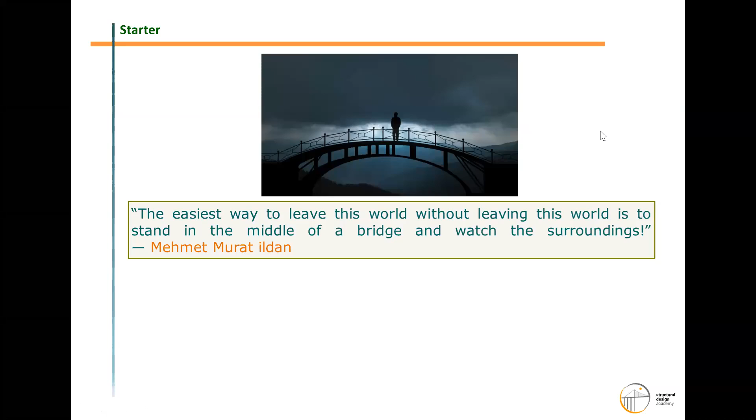Just to get into the subject, I generally prefer to start with a starter, so that we can be involved from the surrounding environment into the subject. To give emphasis on the bridge, what is a bridge as a structure in a philosophical way? It is a structure where if you stand in between, you will feel very relaxed and find that there is nothing surrounding, and you can have real peace of mind. In the seismic context, we can say this is basically human nature, and it reflects well in our structures also.

The more we remain rigid, we have to sustain very high stresses and face many problems and difficulties, and sometimes we may break down or shake down. The same philosophy applies to bridges, and not only bridges, to all structures. Rigid structures generally attract more stress and are vulnerable to more failure. So basically, try to remain flexible, determinant, and just follow the rhythm of the structure, rhythm of nature, and apply a similar rule to our structures. Propose our structure so that it has more flexibility, determinacy, and everyone can easily understand the form of the structure.

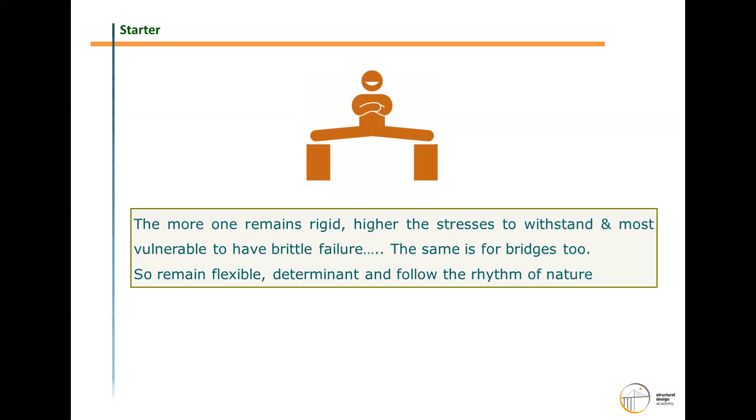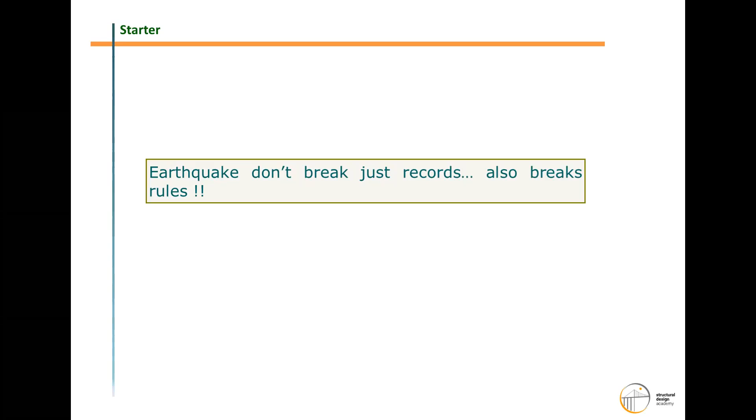Basically, with every earthquake, if we see the history of past earthquakes, it has not just broken records in terms of intensity - say a 4 Richter scale earthquake one year, and the next year in some other region it's 5, somewhere 6, 7, or 8 - but it has also broken the rules. When we talk about breaking the rules, it has been observed that every earthquake has changed the philosophy, engineering, and science that we apply in the design and analysis of various structures. So every time we come to new things, new theories, and new aspects. This is how our entire earthquake philosophy and all earthquake codes have been developed. It is not based on just basic engineering or basic rules - it is from observations of past earthquakes.

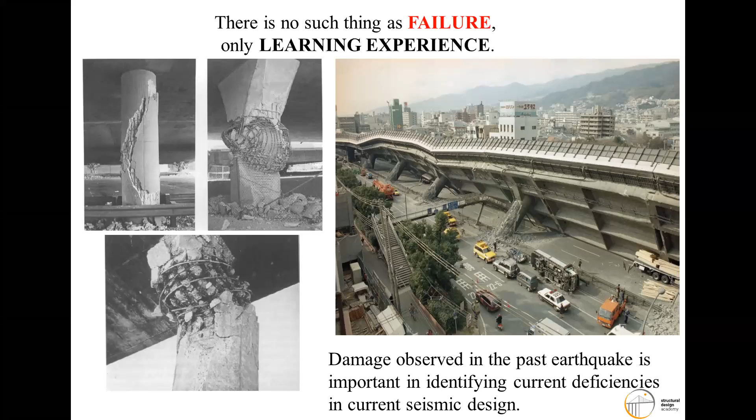When we say failure, it is not just a step down or going behind progress. The important aspect of failure is that it is a learning experience. If you observe any failure very minutely, we can learn a lot. There might be very small things we can learn from success, but there are many more aspects we can learn from failure. All the recent sophisticated codes all over the world for seismic design have been developed based on failure analysis, failure observations, and study of structures which failed during past earthquakes only.

Now, as we are going to discuss the earthquake analysis of bridges today, I want to give you a brief introduction to the structure of the bridge, because I'm not sure how conversant everyone is with bridge geometry and its formation. To understand any structure's behavior regarding any force action, it is most important to understand its formation and geometry itself. So basically, a bridge is made up of three components.

The topmost component, which is the highest elevation in the bridge, is called the superstructure. The part below the superstructure is called the substructure. Basically, substructure provides the platform to raise the superstructure, and the bottommost part is the foundation. Foundation serves the purpose, similar to other structures, to transfer all the forces of the superstructure and substructure to the firm ground, so that the entire structure can withstand and flow the entire force to the foundations.

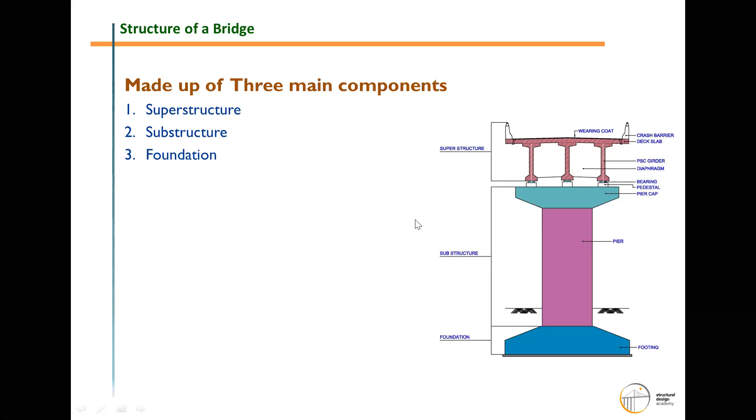Now this is just how the bridge is composed. There is a bit of difference between a building and a bridge, in that a building is basically made up of three main components: slab, beam and column. All these three components are internally connected with each other, forming altogether a frame structure.

But it is not like that in the bridge. Bridges have a simply supported structure type of system most of the time. When we say simply supported, it means the entire superstructure is directly resting on the pier only, so it is not connected with the pier, it is supported on the pier. The superstructure rests on the bearings, which transfer the force to the pier and foundations.

If we talk about the types of superstructures, there are basically three types. One is the slab bridges. Slab bridges are very similar to the slab of our buildings, but comparatively having higher thickness and more width, because it has to withstand higher vehicular loading.

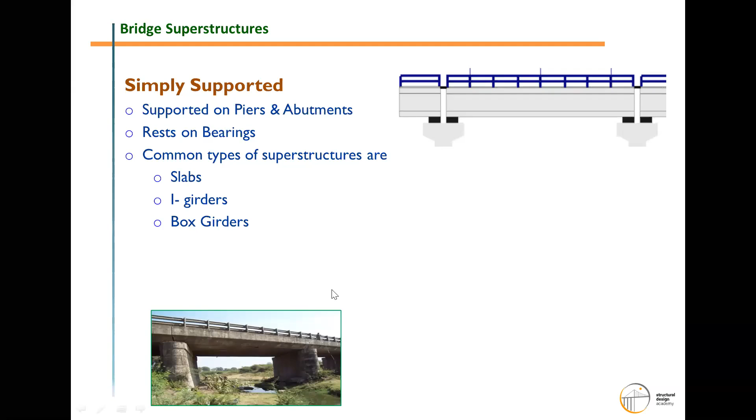Second type of superstructure is the I-girder bridges. The I-girder is basically a long beam having larger depth compared to building beams. Several beams are put together to form a superstructure.

The third type is the box girder. Basically, the box girder is a reformed shape of the I-girder only. All the I-girders are connected with the slab at the bottom also, and then we get a box girder, which is hollow inside. These are the three basic and widely used shapes of the superstructure.

There are other shapes also, but with these three we can discuss the seismic analysis very easily. As we discussed, it is a simply supported span - the superstructure is supported on the bearing, and the bearing is supported on the pier. This means the superstructure is not directly connected with the pier.

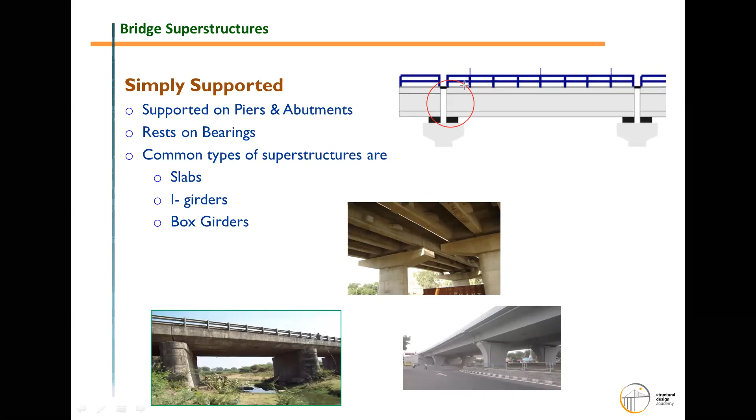Now another form of superstructure is the continuous span. If you see in the previous slide, there is a gap between two spans. That gap is basically to allow the superstructure to contract and expand under thermal variations, so that the internal stresses due to temperature variation do not affect the structure itself. To release those stresses, the gap is given.

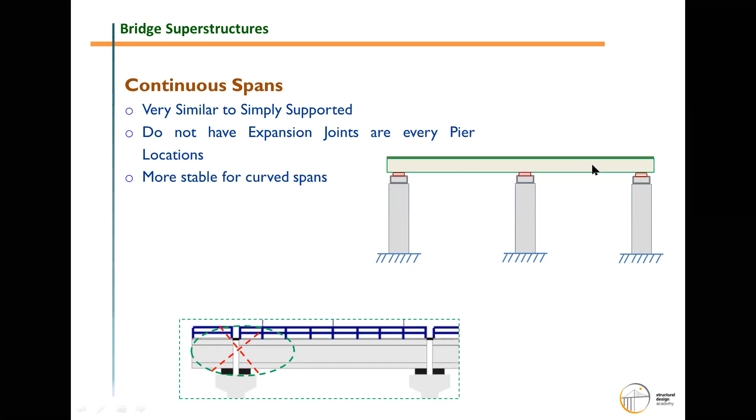In another form, the gap is not there - two spans are made continuous, without that gap, and we can have a continuous superstructure. Most of the time it is very similar to the simply supported structure itself. But because the adjacent spans are interconnected, the benefit is that if we have a curvature in the plan, the stability of the structure is more confident in continuous type structures, because the load shared by one span can be transferred to the other to keep it in a stable position.

Now the third type of superstructure arrangement is the integral bridge. In an integral bridge, there is basically no bearing. We can say it is more or less like a building structure - the pier is directly connected with the superstructure, so the concrete and reinforcement of the pier and superstructure are interconnected. In this case, we have to consider this as a monolithic structure, or we can consider the frame action of the entire bridge system.

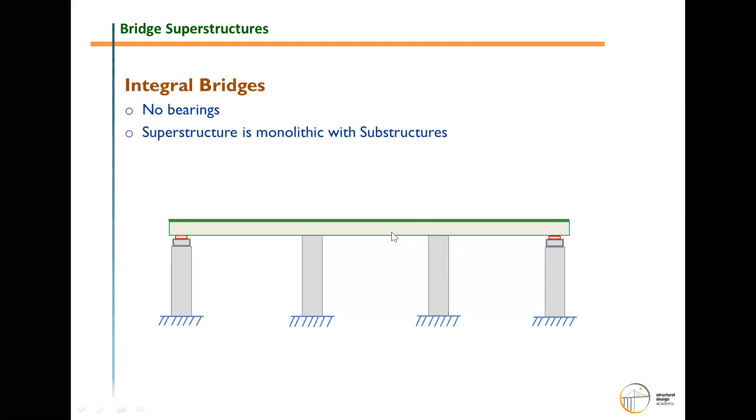Now, from these three types of superstructure, we can understand that the force transfer mechanism from superstructure to substructure works in two ways. If it is a bearing bridge, the force is transferred to the bearing. If we look at this system from a seismic context, basically this is a flexible system - the superstructure does not attract or react to any seismic force, it just acts as a lump mass. Under seismic action, the superstructure will not generate any internal stresses; it will just act as a lump mass, and whatever seismic effect occurs will be transferred to the substructure through the bearings.

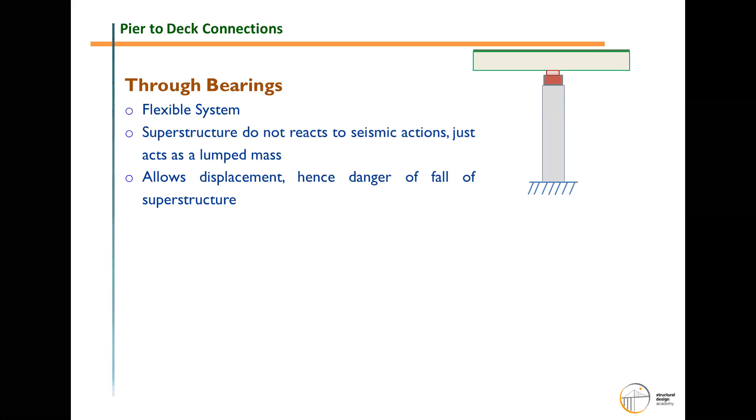As it has no capacity to sustain or develop the stresses under seismic, it allows a displacement because it is just simply rested on the bearing. So the deficiency of this type of system is that there is a danger of fall of the superstructure under the seismic condition due to the horizontal force acting on the superstructure.

In integral bridges, it is monolithic. So the dislodgement of the span or collapse of the span of the superstructure is not there. So this is the benefit over here. But now this is a stiff structure.

In the first, through bearing structure, the piers are pure cantilever. It is just taking the load from the lump mass, so those are more flexible. But now this structure in the integral bridge is more stiff, no longer determinant, it is indeterminate structure. So there is the possibility that stresses from one member to another can disperse easily. Seismically, these two characteristics are very important: that the superstructure will not collapse under seismic, and the stresses from one member to another member can be transferred.

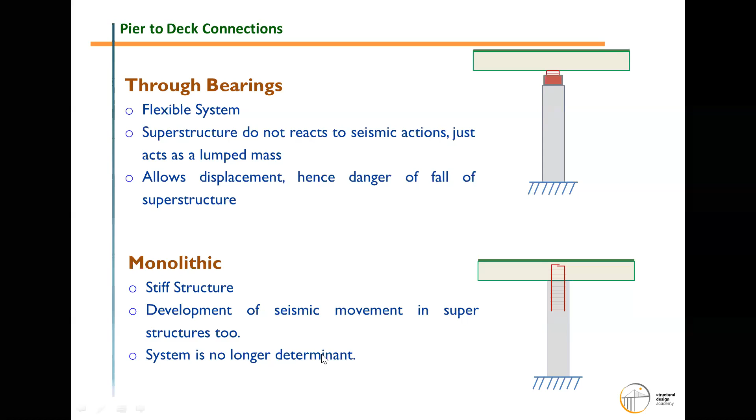First type of pier is a single column type pier, which may be a shape, maybe circular, square, or rectangular. Second type is a wall type pier. Basically it is very similar to the rectangular pier, but when the larger dimension of the column is 4 times more than the small dimension, then it is called a wall type. So it means now it is not more rectangular behavior, it will give a wall type behavior rather than having a column behavior. So second type is wall type.

Many a time we require to support very wide structures, very wide superstructures, and we require a very wide column base. At that time, transverse frame type systems we can follow, which is made of several column structures framed together with a beam at top, beam below the bearing. So basically, three types of columns we are using in bridge structures.

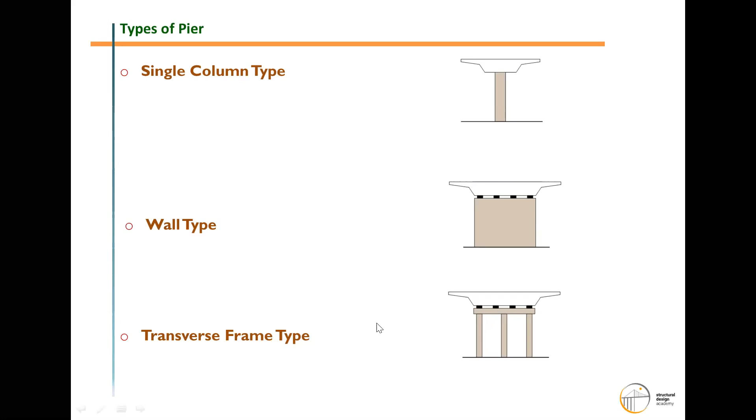Now to have a quick summary regarding bridge and building geometry: the difference between bridge and building, the main characteristic, is that of indeterminacy. Compared to the building, bridge is more determinant. If we say that superstructure is more or less simply supported, and pier is a pure cantilever, then because of this reduced indeterminacy of the bridge, the structure has very reduced potential of energy dissipation and load redistribution. Now, energy dissipation and load redistribution are those characteristics of structures which are highly required in the event of seismic activity. But fundamentally, when we propose a simply supported structure supported on bearings, these two characteristics are highly reduced.

A second difference is that in the building, the entire structure acts as a complete frame. But here the superstructure, which is the topmost structure, just acts as a mass. So you just imagine there is one cantilever support, and at the top of the cantilever, one lump mass is put. So it will produce a very high amount of seismic force to the foundations. Unlike the building, the slab put over the pier will not give diaphragm action. It will just act as a mass only and contribute to the seismic weight itself.

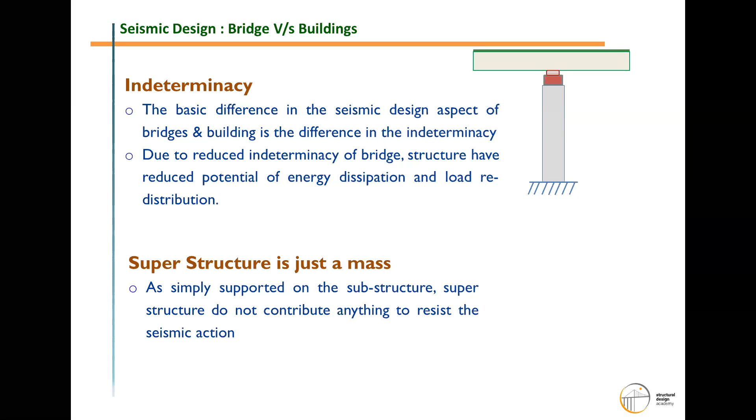Now, basically, we just want to understand how we analyze bridges under seismic conditions. So we will start by understanding how the engineering and science of seismic design of bridges began. So we first try to understand how bridges were affected or damaged during seismic events, so that we can summarize what are the vulnerable areas or critical points that we should consider during the seismic design of the bridge.

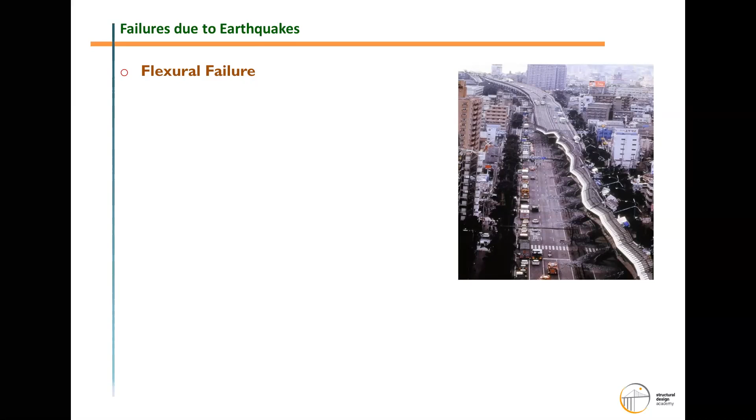The most vulnerable and dominant failure we have observed during past earthquakes, most of the time, is the flexural failure. In flexural failure, the element which experiences the highest flexural stresses fails first. In a bridge, the highest flexural stresses are observed in the pier, because it is a cantilever pier supported at the base only, and it attracts the highest moment at the base. If you see the photograph on the slide, you will see a series of piers failed during the earthquake at the base itself. So this is the flexural failure.

Second is the shear failure. Sometimes the ultimate limit of the flexural stresses is not reached, but prior to that, the shear stresses cross the limit, and we get shear failure. Shear failure is always a brittle failure, and in our structures, we generally do not want any brittle failure, because it is sudden, without warning, and leads to complete collapse of the structure. We do not get any warning process. So that's flexural failure, and this is the shear failure.

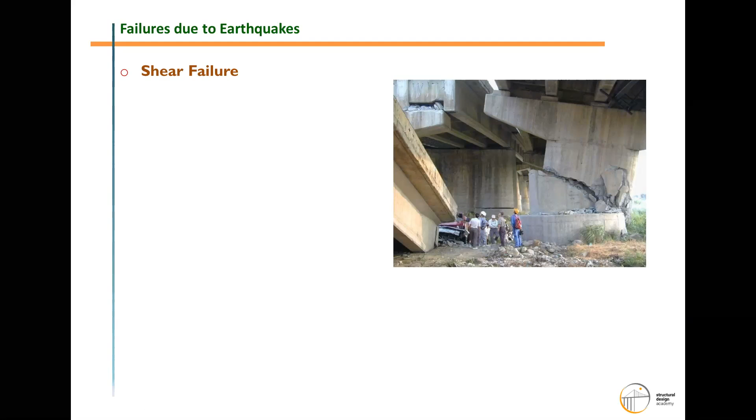Third one is the superstructure dislodgement. As we have discussed, the superstructure in a bridge is not connected with the substructure; it's just put on it. During seismic action under horizontal forces, the entire superstructure may dislodge from the substructure. So it can be observed that the structure is not damaged because of the earthquake forces itself, but because the structure has dislodged from its position and fallen from a height. Because of this falling from height, it gets distressed, damaged, or collapsed. If you see the history of bridge failures during earthquakes, the most numerous and most fatal failures observed are due to superstructure dislodgement.

If the structure is not entirely dislodged from the support, it might instead have displacement, as we see in the figure at top—it is slightly dislodged from its position and the corner concrete is crushed due to excessive compressive stress. In this case it is not a failure, but we cannot use this structure again after the earthquake before carrying out proper repair and rehabilitation.

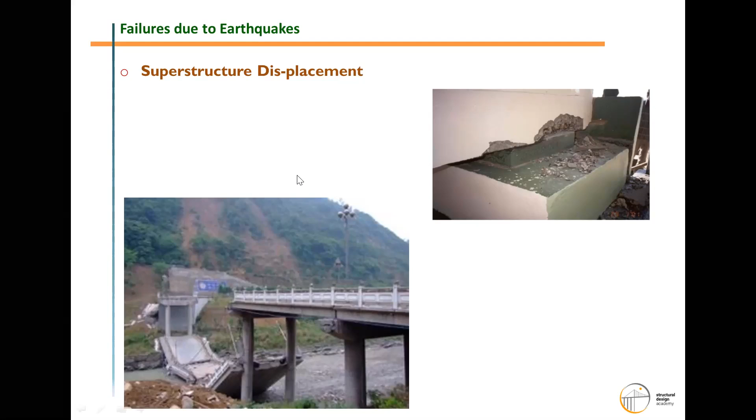Fourth and last one is the foundation and soil failure. This is the most vulnerable failure—very difficult to predict, very difficult to engineer, and at the same time very difficult to find a proper solution for. Basically, if our soil is prone to liquefaction characteristics, during the seismic event, when the soil mass around our foundations is prone to liquefaction, it loses all its capacity to withstand the force. Liquefaction is the losing of the shear capacity of the soil. Once the shear capacity of the soil is lost, it becomes more like a fluid. It is no longer a confined or solid mass, and it cannot have any bearing capacity to withstand the forces of the structure. So this is the most vulnerable failure, and once it occurs, it is next to impossible to repair the structure. We entirely have to discard these structures, because foundation failure occurs at a greater depth—it is not open, we cannot open the entire foundation, and we cannot understand the extension of the damage occurred below the ground. So this is very critical to take care of during the seismic analysis of the bridge.

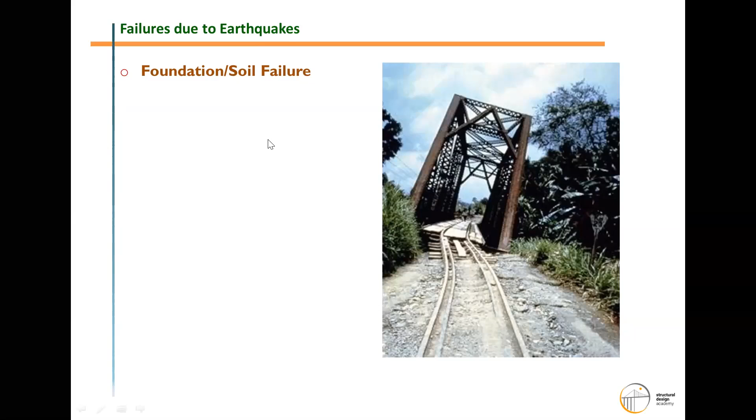Now, if we observe all the cases worldwide for the various seismic events, we can find out that the most vulnerable or most commonly observed failure is the failure of the pier. Because, as we discussed, it gets the highest flexural moment and has the higher stresses to withstand during seismic events.

Basically, before failure, the structure itself yields. And during the yielding, if the surrounding concrete cannot withstand as a single unit intact mass, it causes the failure. To predict the failure mechanism, we must understand the philosophy of the plastic hinge.

We'll discuss the plastic hinge in more detail in subsequent slides, because the plastic hinge is that parameter or behavior of the structure which itself has the capacity to take care of the entire seismic force on the structures. To understand the plastic hinge, we should have proper understanding of confinement, shear, yield prediction, yield penetration, and buckling of the bar.

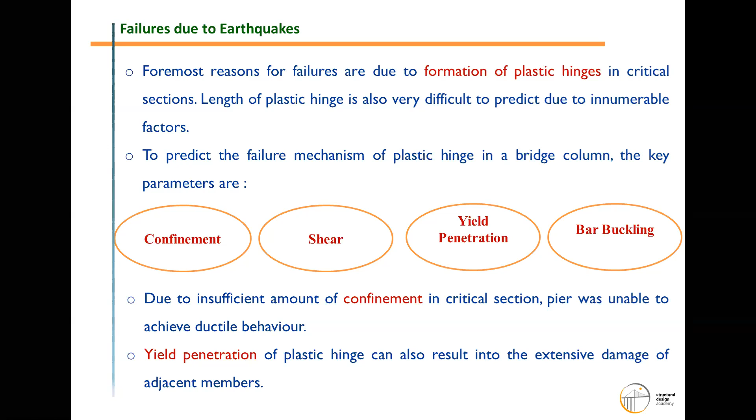But as it is very simple, it is very sensitive. There are small chances or arrangements where stresses from one element can be transferred to the other element. Because if there is a chance that stresses from one element can be transferred to the other, there is a chance that the locking of the stress cannot occur. And if the locking of stresses does not occur, it is very easy to withstand any seismic force on the member.

Secondly, the structure is not monolithic. So even if we find a way to make the column or foundation strong, the superstructure is still vulnerable to collapse from its position. And more critically, the failure in case of the bridge is such that if the bridge fails, the system fails.

What we mean by that, suppose you just imagine that there is an earthquake in some particular area.

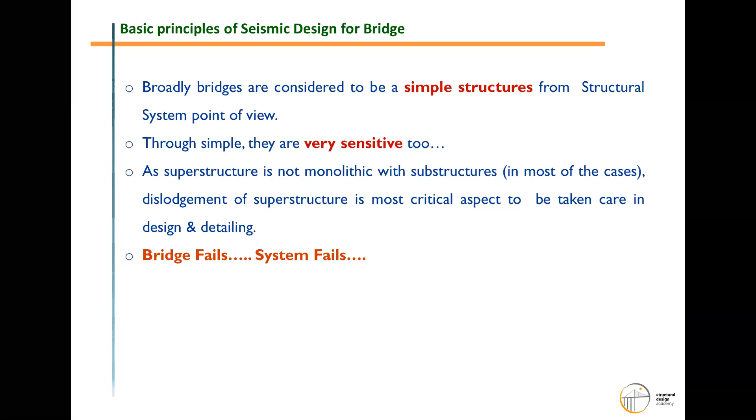In the last four to five decades, the practice or understanding philosophy of all the countries was to increase the capacity demand of the structure so that we can meet the event. It means suppose some magnitude of earthquake force is given today, and tomorrow we experience any more earthquake, we just increase the capacity demand of the structure.

Now, what do we mean by capacity demand? To take a very simple example, suppose a cantilever pier of a particular size and reinforcement is capable of taking up 50 kilonewton meter of moment, and we observe...

over the last two to three decades, it is observed that day by day we are just increasing the concrete capacity, concrete sizes, and adding material. But even though we have not reached a final satisfactory solution, we are making our structure more uneconomical, and even with this approach we are still getting some damage.

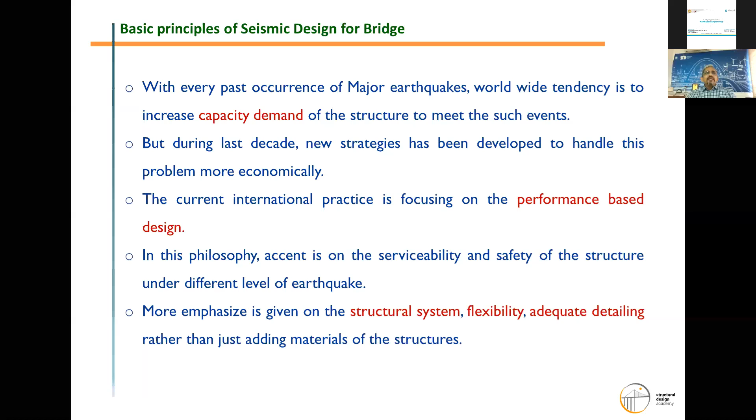Along with this performance-based design, it is observed that we should detail our structure such that if damage is to happen during an earthquake, it should be at a location where we want it. That location should be easily accessible and easily observable, so we can gauge the extent of the damage and easily repair it. It should not happen that we are unaware, during design, of where the structure will collapse or be damaged.

The second important philosophy developed in recent codes is that our prime intention should be that the foundation remains undamaged. Whatever configuration, structural size, or structural system we propose, we have to ensure the foundation is not damaged during an earthquake.

Why does the code emphasize that the foundation should not be damaged? First, it is a buried structure - after an earthquake, one cannot visually inspect the damage to the foundation. We cannot even predict whether there is damage or not. And even if we expose the foundation and find damage due to the earthquake, it is very difficult to carry out repairs because it is confined, surrounded by soil.

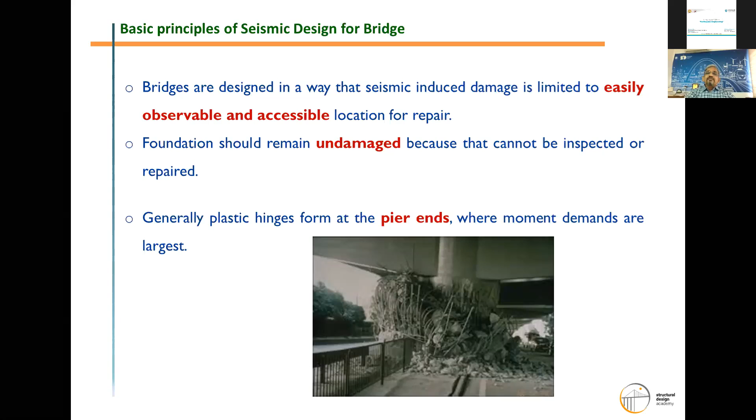Now, with this background, let's see how seismic codes for bridges developed - what was practiced earlier versus today. Earlier, there was only one code in India for all types of structures, IS 1893, initially published in 1962. Starting from 1962, it was not intended that this code would lay down regulations ensuring structures suffer no damage during an earthquake.

It means that during the formation of the code, it was accepted that even after designing based on this code, structures would have some damage during an earthquake. But the principle emphasized in this code is that, as far as possible, the structure should respond to the earthquake with minimum structural damage but without collapse. This 'without collapse' is the very important essence of this code - it guides us to design structures that should not collapse during an earthquake. It is okay if it is damaged, even if that damage is irreparable.

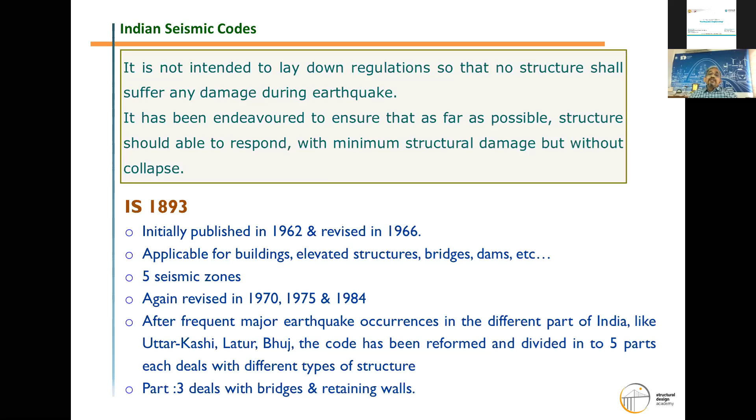Now the code committee has realized that it's high time our code should be completely reformed from its past. The code has been divided into 5 parts, and each part deals with a different type of structure. Part 3 of IS 1893 deals with bridges and retaining walls. We'll discuss this separately.

IS code is basically the code published by the Indian Standards Committee in the field of bridge engineering. All the regulations and codal provisions are established by IRC, the Indian Roads Congress. A number of extensive, elaborated codes have been published by IRC in different categories for different purposes. It is a lot in number - more than 100 or 200 codes for each particular component.

IRC 6, first introduced in 1958, covers seismic criteria. Basically, IRC 6 is for the loads and stresses to be considered for the design of the bridge. In this code, published in 1958, seismic considerations were covered.

In 1958, they defined only 3 seismic zones, and these zones were not like zone 1, 2, 3 or 2, 3, 4. It was based on seismic damages - categorized as liable to severe damage, liable to moderate damage, and minor or no damage. So if we compare IRC 6 with the IS code, IS 1893, at that time itself there was a vast difference in philosophy and provisions.

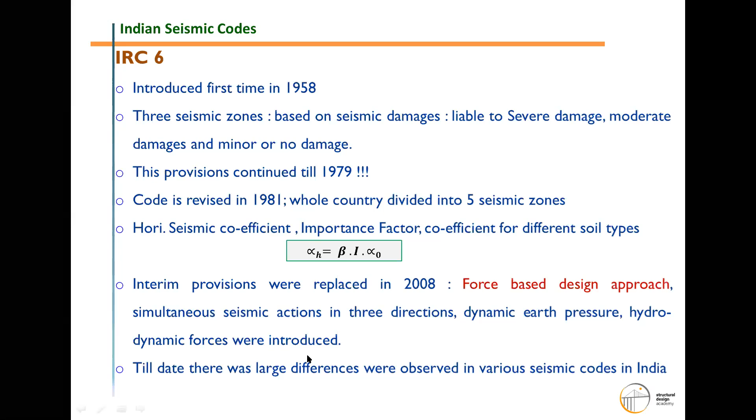In 2010, the Indian Seismic Code started to catch up with all developed countries and tried to implement all the new concepts of seismic design. Here, the seismic coefficient method was replaced, along with the response reduction factor being introduced. So the coefficient method is now obsolete, no longer in existence, and the equation of the response reduction factor has to be considered to find out the seismic force: Z by 2, I by R, SA by G.

Here R plays a very important role, and now it is very logical. Basically, R is the response reduction factor, and it gives the flexibility or the behavior of the structure under seismic loading. Depending on this, we can apply the reduction factor to the structure. It means in a particular area, if we have different geometries of structures, we will have to take different magnitudes of force. This is logical. In the seismic coefficient method, whatever type of structure you have in a particular area, you get the same amount of seismic force.

But the major challenge we faced in the field is that the code was not revised for almost 30 years. After the Bhuj earthquake, it was a very practical question in our minds: in spite of such a high intensity earthquake, we did not observe very severe damage in the bridges, which we had actually observed in Western countries.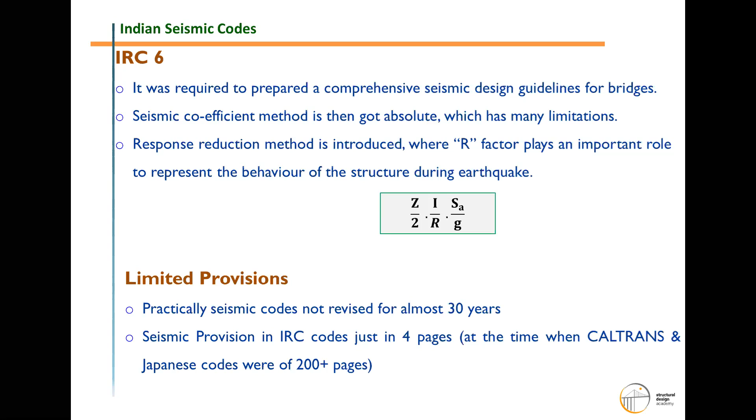So recently introduced IRC Special Publication 114 has removed all these limitations. This is a special code for design of bridges, IRC SP 114, which extensively and elaborately discusses the seismic behavior of the bridge. It is also approaching new analysis techniques and design methods, and now it is very compatible with other international practices.

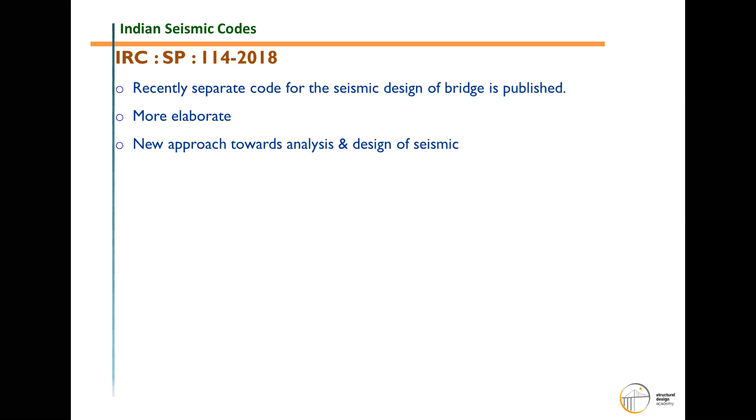First and prime importance given in IRC SP 114 is that a state of art design should be followed while we design the structure. In this code, if we read most of the chapters, we can feel that the code has tried to fill the gap between state of art and design practice. Nothing new they have given, they have just tried to give the structural system prime importance.

So when we talk about state of art design, we can differentiate it into 3 main categories. First is good structural configuration, meaning we should propose our structure and geometry in a way that the shape, size, and system directly ensures a smooth flow of inertia force. This smooth flow, starting from the top of the superstructure to the bottom of the foundation, should be freely transferred from one element to another. Because when the stress flow gets locked at one location, that location becomes highly stressed and more vulnerable to collapse or damage during the seismic event.

Second is lateral strength. It's very logical that since seismic forces are primarily lateral forces, we have to concentrate on proposing a system that has lateral strength. When we say system versus element, these are entirely different categories. Instead of putting a laterally strong member, we should establish the system itself as a whole to be laterally strong. If you want to propose a laterally strong member, a single member should be very strong and it should consume a lot of material itself. But if you propose a good system with very tiny and thin members, we can still achieve a laterally strong system, with good ductility.

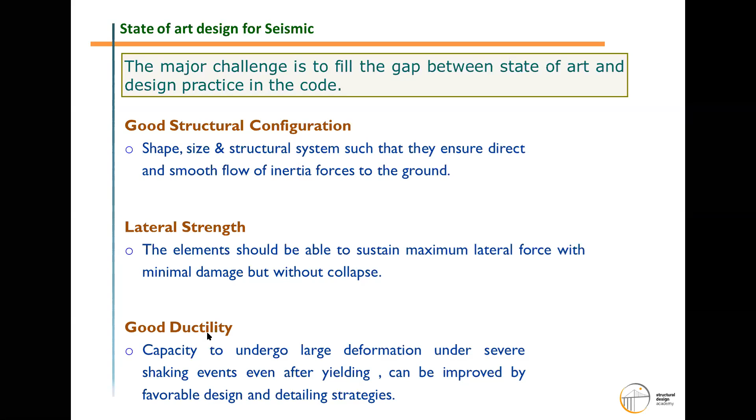During an earthquake, it is seen that any structural system which is able to undergo large deformation before yielding and even after yielding performs very well during the seismic event. This large deformation within the material is possible only due to detailing. So detailing, structural system, and strength of the structure are of prime importance as defined in the new IRC code.

Now, just to understand state of art design, let's take the example of various piers. Why are we discussing piers? Because the superstructure is not going to contribute anything for seismic resistance. It is only the pier at the bottom which will carry all the seismic force.

So we should smartly select the section of the pier so that it performs very efficiently during a seismic event. In a pier we have the circular section. A circular section is considered the most efficient from a seismic point of view if the demand for seismic resistance is more or less equal in both directions, transverse and longitudinal. At the same time, it also provides very effective confinement detailing and restrains buckling of the bar during lateral forces.

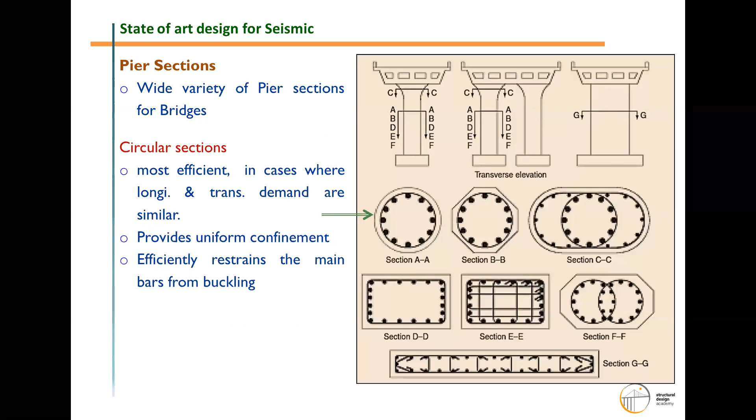Now, another option is a rectangular section if we are not okay with the circular section. But the problem with the rectangular section is that there are very limited resources, very limited detailing options to protect the main reinforcement bar from buckling. At the same time, the core concrete of these structures remains unreinforced. If you see in section DD, it's a rectangular pier. We can provide stirrups on the outer perimeter, but the entire core concrete inside remains unreinforced.

To improve it, we can adopt section E, where internally we can put stirrups and links and all that. But basically, it is adding cost to the structure. We have to use more reinforcement. Now, reinforcement is very congested in this area, so it requires extra effort for the concreting. And at the same time, this additional stirrups or reinforcement which we have provided is not required basically to take up the shear.

Shear strength might be okay with the stirrups which we provided in section DD itself. So whatever additional stirrup arrangement we have proposed in section E is just to have the core concrete confined. So more or less, we do not consider the rectangular section as an effective section from the seismic design point of view.

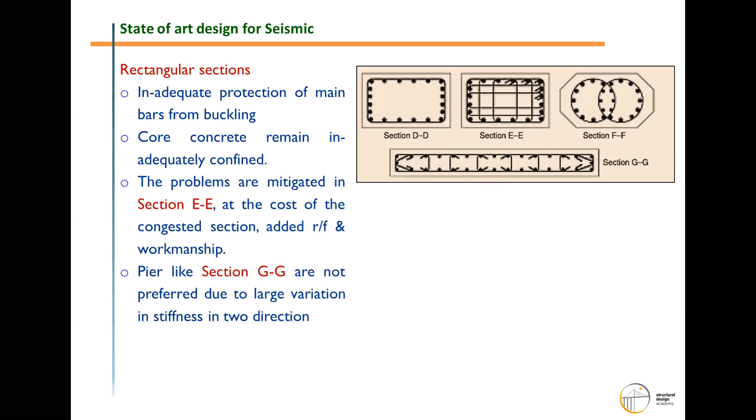Let's compare point by point the benefits and demerits of each system. When we propose the single column system, it is very easy to design and construct. Very easy to design in a way that it is a pure cantilever itself—you just have to do WL by 2 or WL square by 2, that's it. It is very easy. Single shape of the formwork, only vertical reinforcement and stirrups, and just pour the concrete.

This is also very suitable if uniform forces are acting in each direction, transverse or longitudinal. There is no issue with the behavior of this type of problem. More important is there is only one location where a plastic hinge will form. If it is a pure cantilever, it is at the bottom. Plastic hinge means where the more flexural stresses will concentrate. So in the cantilever, it will be near the support.

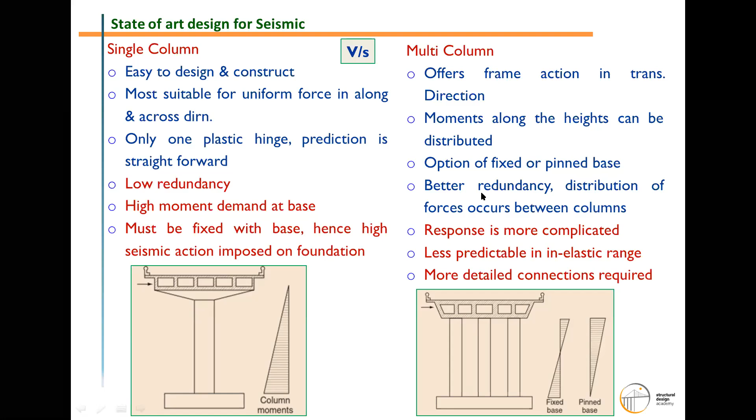So the designer has the flexibility to choose the structural system in a way that it can have the highest R factor, so that they have the lowest possible value of seismic force.

If we see, if we select the RCC wall-type pier, in which the rectangular pier has one dimension very large compared to the other, the response reduction factor is the lowest one, because we cannot predict or have a hinge in the transverse direction due to the high rigidity of the structure in that direction. But on the other hand, if we go for the longitudinal or single column pier, we can have a response reduction factor of 3. So compared to the wall pier, we can design for 1/3 of the seismic force in our structure. This is very important to understand and keep in mind while selecting the type of supporting system in the bridge.

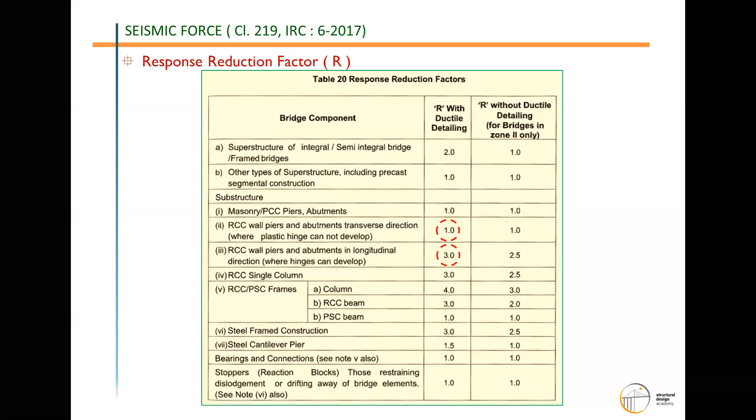Besides the state of art design which we have discussed, the code puts more emphasis on ductile detailing. Now, what is ductile detailing and how do we take care of it? Before that, let's understand what problems were faced in past earthquakes because of inadequate or non-ductile detailing.

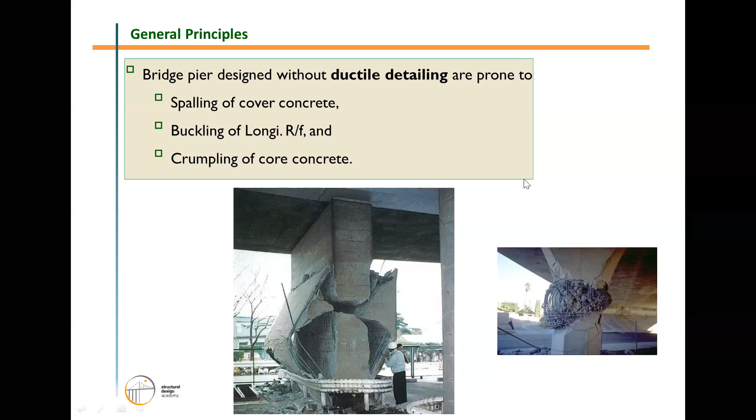We basically found that the core concrete or cover concrete has spalled off, reinforcement has buckled. Longitudinal reinforcement, which is the main force transferring element, has buckled, and the core concrete has completely crushed. If you see in the second photograph, the complete core concrete has been crushed. This is almost a damaged column which cannot be repaired in any case. So these are the types of severe damages we have observed in past earthquakes because of improper or at all no ductile detailing.

Second is shear failure. Now, shear failure is a type of failure which is many times very difficult to control, because we know that to have good shear resistance for any structure, we require a larger depth. And a larger depth in seismic structures makes it more rigid. Structures having larger depth will be more rigid, and a more rigid structure will attract more force. So to tackle shear failure in the pier itself is very challenging. We can say there is only a single parameter or very limited parameters to control the shear.

The capacity of the structure cannot be controlled otherwise. We have to increase the size to have a safe shear design, and increasing the size will attract more seismic force. So it is a cyclic process, a circular loop. We are going deeper and deeper into the problem.

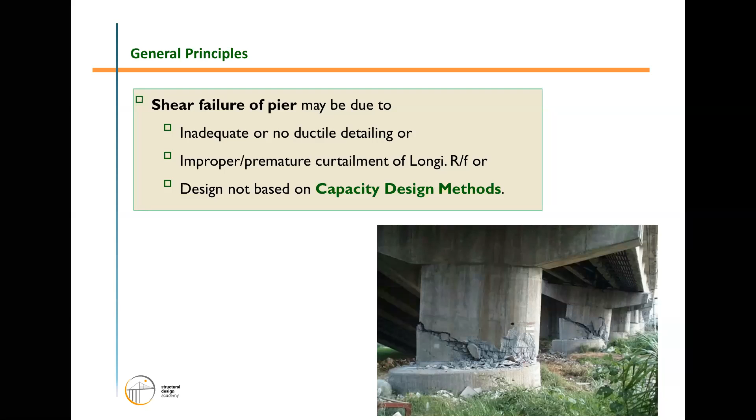This has made the code reform into two types of systems: one based on force and the second based on capacity. But before that, some relaxations have been given by the code - culverts and small bridges, minor bridges up to 10-meter length in zone 2 and 3, and small bridges up to 60-meter length with spans having 15-meter, are not considered to be designed.

Now, whatever may be the criteria, it is very important to understand why such relaxations are given. If we try to understand those relaxations, it becomes very clear what philosophy has been developed by the code committee during the formation of the code.

That is, the code is not intended to have foolproof seismic design. They do not want your structure to be seismic proof. Limited damage or damage of selected members are acceptable, because damage to a particular single member, or some of the members, is not a complete collapse of the structure.

On the other hand, if we intend to have seismic proof design, the cost of the structure is so much that no one can spend so much amount on a single structure. So some unimportant structures of small size, which can be easily repairable, are kept out of the scope of earthquake design.

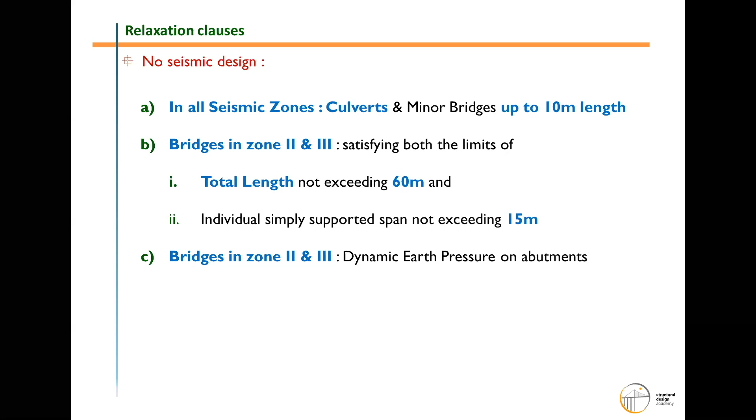Now, to meet with the shear and flexural design criteria, the code has defined two different systems which can be used for the analysis of seismic effects.

First seismic analysis method is the Elastic Seismic Acceleration Method, ESAM method. Basically, this system is the very fundamental use of the response spectrum method, in which only the fundamental mode of vibration is used. All the seismic criteria, seismic coefficients we can use. We do not need to have the dynamic analysis for this method.

For which type of structure can we use this system, the Elastic Seismic Acceleration System? A very simple bridge having skew not more than 30 degrees, radius not less than 100 meters, and pier height not more than 30 meters - we can design all such bridges under the ESAM method.

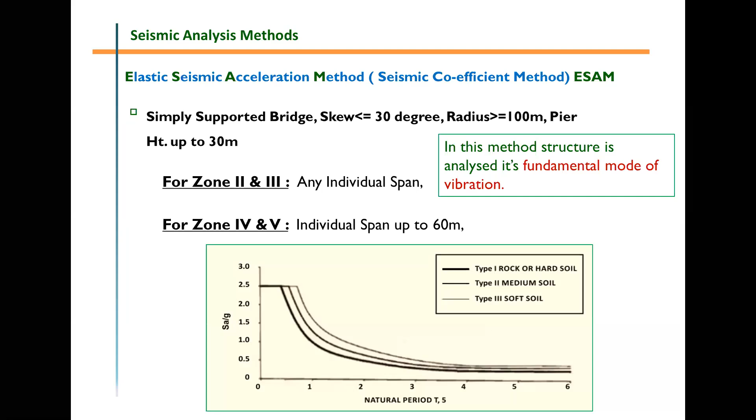Now, a more systematic, sophisticated, and rigorous method is the Elastic Response Spectrum Method, which can be applied to structures that are more complicated in geometry, in magnitude, and in nature.

Having higher skew, large radius, very low pier height ratio, in which the fundamental mode of response is not sufficient to predict the behavior of the structure - in such cases we have to carry out dynamic response analysis, where first as well as all subsequent modes have to be considered, and we have to find out what higher modes we need to consider during the design.

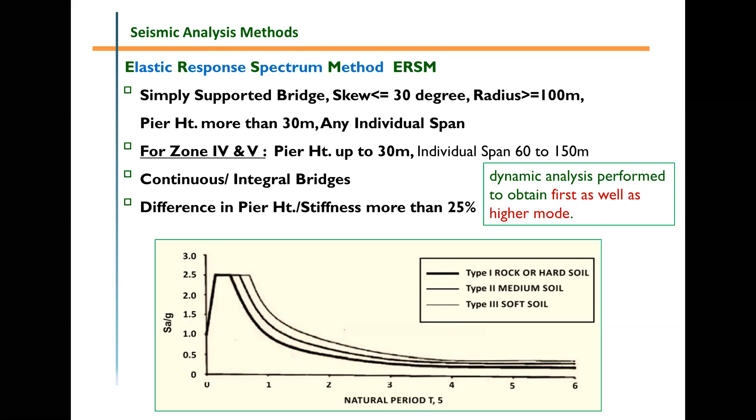Depending on these two methods, seismic analysis method and response spectrum method, the basic philosophy developed by the code is strong beam, weak column - entirely reverse from the building design approach.

Why is strong beam weak column theory used here? Because as we have seen in the formation of the geometry of the bridge, the most vulnerable and highest force-taking element in the system is the pier. So the pier should be designed as the weakest element, so that the entire force can be concentrated at one location itself.

So while designing the pier or bridge system, we should keep in mind that it is okay if our pier or vertical member observes some deficiency or damage during the earthquake. But our superstructure and foundation should not fail or feel any damage. This is the philosophy of strong beam and weak column.

Now to safeguard the foundation below ground level, as per this philosophy, the code has given the overstrength factor, because as we've seen, the pier is fixedly connected with the foundation. There is no other way that the force from the pier can be reduced for the structure and foundation. It means whatever force will be at the base of the pier, the same amount of force will be at the foundation.

Now, overstrength factor. Let's try to understand what is overstrength factor. Basically, overstrength factor is the magnification factor given to the capacity of the structure. Now, what is the capacity of the structure and what is the demand? In case of the pier and foundation, the demand on the foundation is that the pier will transfer its full force to the foundation. If we design the foundation for the demand only, it is more likely that the foundation may also experience damage at the same intensity of stress. But our intention is that the foundation should not have any damage, meaning we should have higher capacity of the foundation compared to its demand.

So the factor of capacity to demand is the overstrength factor. In IRC SP114, a 35% increase is given to the concrete substructure, and 25%, that is 1.25, is given to steel.

I think somebody is raising the hand. I'm not sure how I can respond to you. Actually sir, we have told them they should place their question in the QA box and we will answer accordingly. That will be fine, sometimes by mistake they may raise their hand, that happens. Yes, right, so it will be okay. At the end of the session we can discuss all the questions, and we can go back to the slides also if required. Yes, thank you.

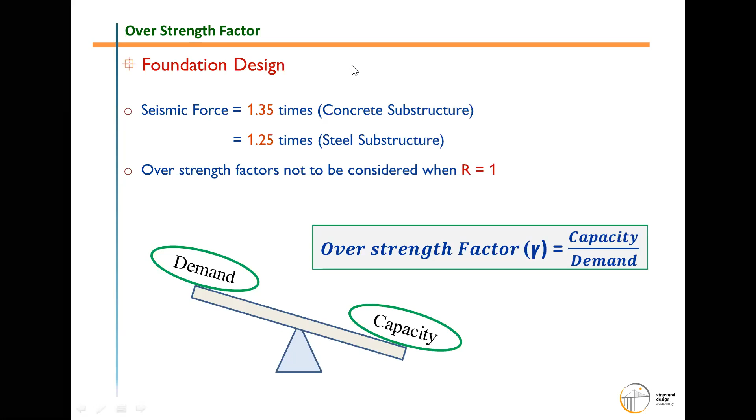Now, depending on the new provisions of the code, the new code is completely following the philosophy of capacity based design.

Now, to understand capacity based design, let's first understand what was the philosophy prevailing before SP114. Earlier, force-based design was followed in all codes, not even just in India, all over the world. In force-based design, basically what we are doing is analyzing the structure for seismic effects, finding out the various stress requirements. Based on the stress requirement, we fix the sizes and amount of reinforcement for the structure. To safeguard the structure, we just limit the permissible stresses. So we are only having one tool to safeguard the structure, which is to limit the permissible limit of the actual material stresses.

So every time with the increased intensity of the seismic force, we are increasing the force on the structures. This is called force-based design. While adopting the force-based design, the structure always uses the elastic model to predict its strength. It never overcomes or crosses the elastic model and is never allowed to go into the plastic model.

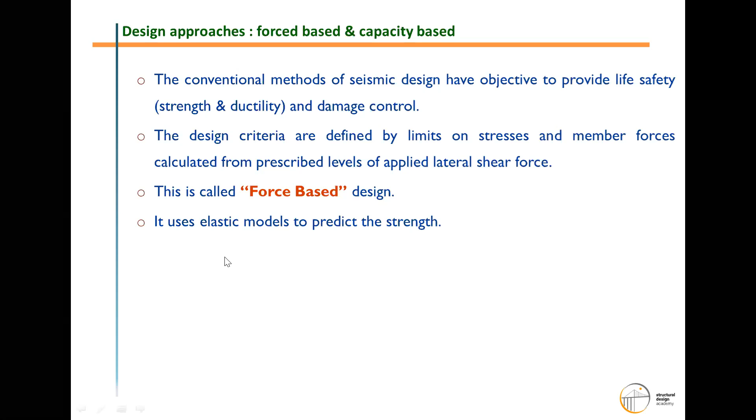Now, on the other hand, in the recent design approach of capacity design, importance was given to the state-of-art design, which we have discussed. We should consider the proper selection of the member which is more flexible, which allows more energy dissipation. More energy dissipation means it will allow good behavior during the earthquake.

It will yield late, or even after yielding, it has the chance to enter into the plastic zone. Now, when the structure enters the plastic zone, it is vulnerable for collapse. In that zone, ductility comes into the picture.

So in capacity-based design, ductility criteria is given prime importance, but at the same time, it is emphasized that ductility should be given in the bending action only. It means we should make our concrete confined in a way that ductility is available for the flexural action only, not in shear and axial action, because both shear and axial behavior of concrete is brittle behavior.

So it means we should not compromise on the shear and axial capacity of the concrete. Rather, we should build more ductility into the flexural action. By this, we are allowing the structure to yield more in flexure.

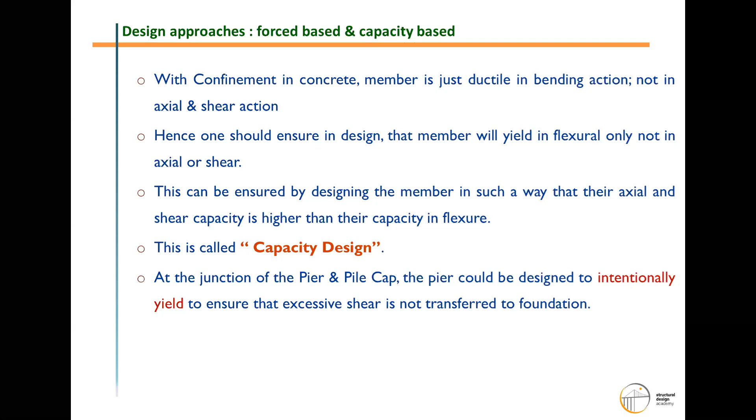Now, to understand more deeply the shear capacity or capacity demand, we have to understand how the structure should behave under seismic action. Now, for any ductile failure model...

We require that the structure under lateral forces should undergo large deformation, because the higher the deformation, the more the energy dissipation. In seismic design, energy dissipation is a very supportive parameter to sustain the seismic force in our structures. So large deformation and energy dissipation can be allowed because of the ductile failure model of the flexure only. This is not possible for the brittle failure model of shear. That's why we have given importance to the flexural model for ductile behavior.

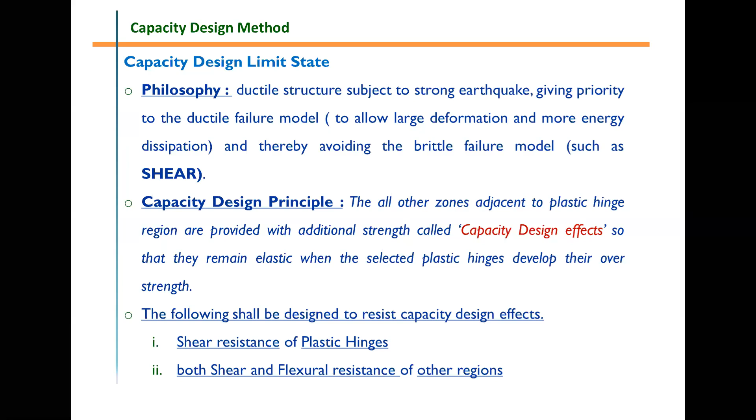Now, to have further clarification on ductile and brittle behavior, we have taken the example of a chain. One chain is made up of different links, and each link has a different capacity. So if you pull this chain from both ends, and you want a particular element to break first, what do we require?

We require to make it ductile. Why do we require that particular element to break first? Because we know that particular element, the red element in this slide, is a ductile element, and a ductile element will give us warning before failure. It means the failure of this link will not be sudden.

So we will have beforehand warning that this structure is going to break from one end. Because the link which is brittle in nature, having higher capacity, will not break fast, but the ductile link will break fast. So we have sufficient warning before failure of the structure, and we can take precautionary actions.

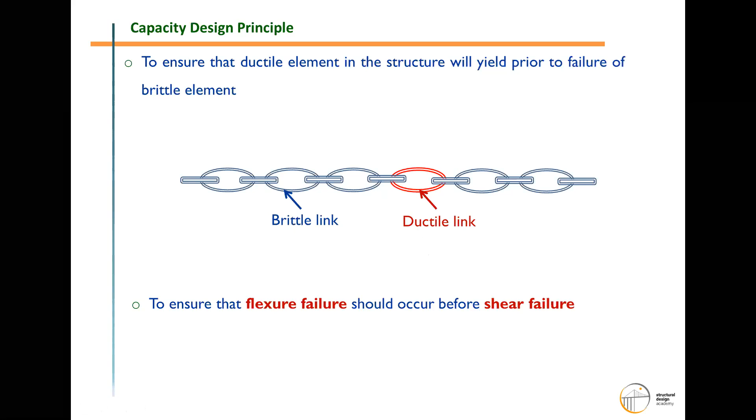Now, to select the plastic hinge, the code has given various provisions which are very logical. To determine the plastic hinge, the simple principle we adopt is: what is the highest flexure zone? What is the point where we are experiencing the highest flexure moment? That is the plastic hinge.

In the cantilever pier, naturally it is at the bottom of the pier. In case of pile foundation, when we adopt a pile foundation rigidly connected with the pile cap, it is fixed at top and at bottom also. At bottom, when we say bottom, it does not mean the termination of the pile, but the fixity point of the pile. So the pile has two hinge points and the pier has one hinge point.

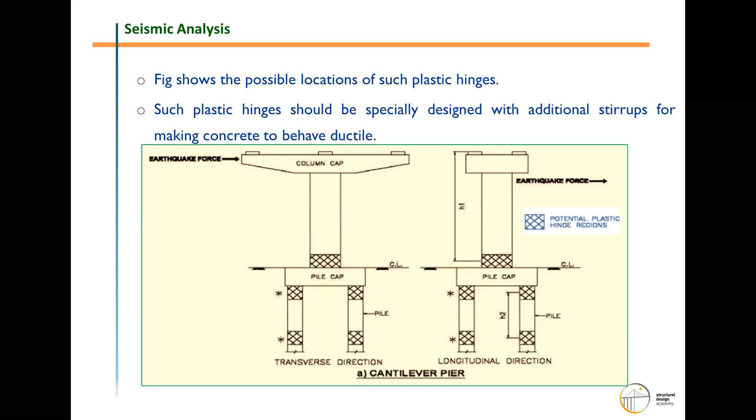But suppose we have adopted the hinge in the pile, just imagine how we can come to know there is damage during the earthquake, because it is completely buried in the soil. And it is also very difficult to repair these hinges, or the damage to the hinge.

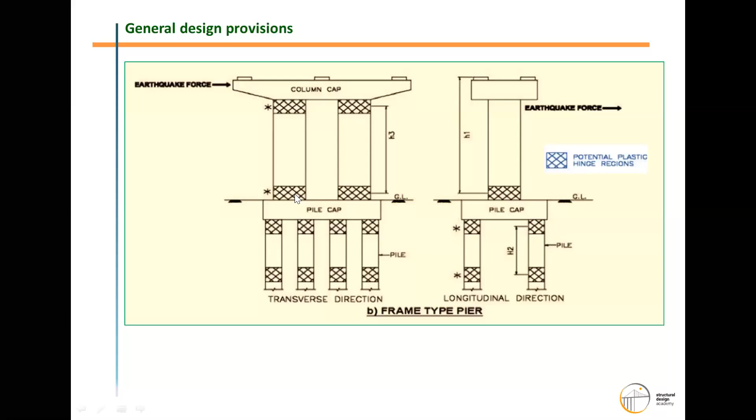That's why an overstrength factor of 35% is given to the foundation, meaning the capacity of the foundation should be 35% more than the capacity of the hinge at the pier. So that under seismic conditions, the hinge will form first in the pier, it will fail, and the second hinge will not develop in the pile.

So in the plate type system, we can provide ductility in one direction only. We cannot provide ductility in the transverse direction. So as far as possible, we should try to avoid selecting a member which has a difference in ductility between the two directions.

Or in simple terms, we should try to avoid such member sizes for the pier where the flexibility in different directions is very vast, where the difference between the flexibilities is large, with the pier being very rigid in the transverse direction. So it will attract more force.

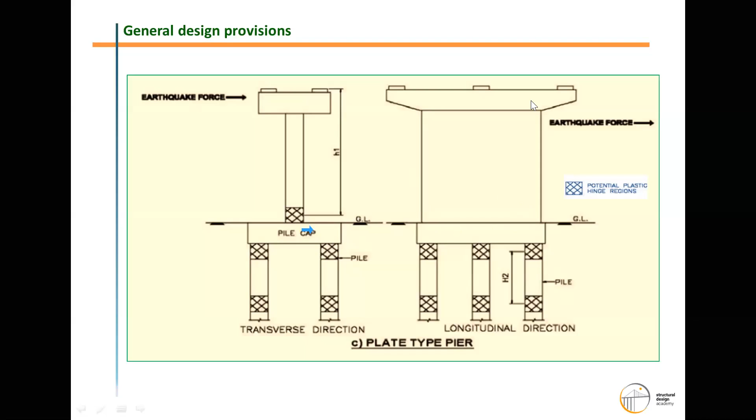Now coming to the detailing part, in all types of structures, not just for seismic but for other types of loads, whatever the figures say during calculation, the detailing we follow is more important. Detailing does not mean just the numbers - providing 32 dia, 10 numbers reinforcement is not just detailing. Detailing means how we are providing the reinforcement: what is the location, what is the anchorage, what is the development length, what is the core concrete embedment we are proposing. All of this plays a very important role, even though those calculations are not reflected in our calculation.

But it is very much important, and most importantly in seismic design, since we want the structure to be ductile, the detailing is very much important.

Now to understand the behavior of concrete under ductility, we know that concrete by its own nature is a very brittle material and it suddenly fails. We never intend our structure to fail suddenly. But concrete can also be made ductile with proper confining reinforcement. If concrete is confined all around by reinforcement, then brittle failure, bulging, or collapse of the structure will not occur.

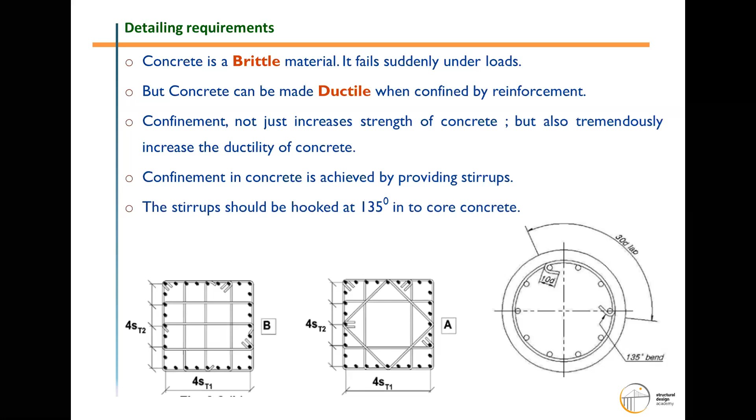Now I would like to discuss the most dangerous and most commonly seen failure of bridges, which is the displacement of structures. I want to discuss various incidents and how to take care in the detailing of the bridge, what we are doing, and what the code provides for these situations.

Basically, the superstructure is supported on the substructure through the element of the bearing, and these bearings are very small in size compared to all other elements of the bridge, and are fragile and brittle in nature. The capacity of the bearing is quite high to take up vertical or gravity loads, but it has very limited capacity to take up lateral forces. In general, the bearing's capacity to resist lateral force is almost 25 to 30% of the vertical load - meaning only about 25% of the seismic force produced in the lateral direction can be taken by the bearing. If the force exceeds this percentage, the bearing will not perform properly, and under poor performance or failure of the bearing, large displacement of the superstructure will occur, sometimes leading to complete collapse of the superstructure from the bearing itself.

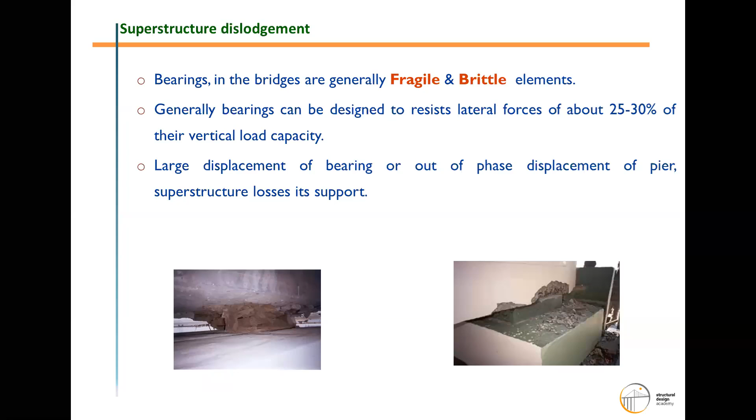Now to safeguard against this, the first and very fundamental rule the code gives is that one should propose proper seating length of the structure into the pier and abutment. Since the structure is simply rested on the bearing, we should have sufficient width of seating over the bearing so that it will allow some displacement and will not cause complete collapse of the structure.

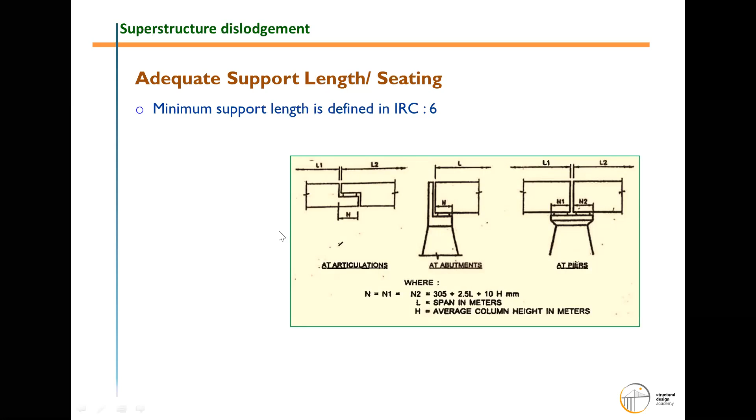Now, many a time, just the seating length of the structure at the support is not sufficient because in the higher seismic zone of 4 and 5, the displacement of the superstructure is so high that even with sufficient seating length, the structure may dislodge from its position. For that, a seismic arrestor or reaction block is proposed by the code.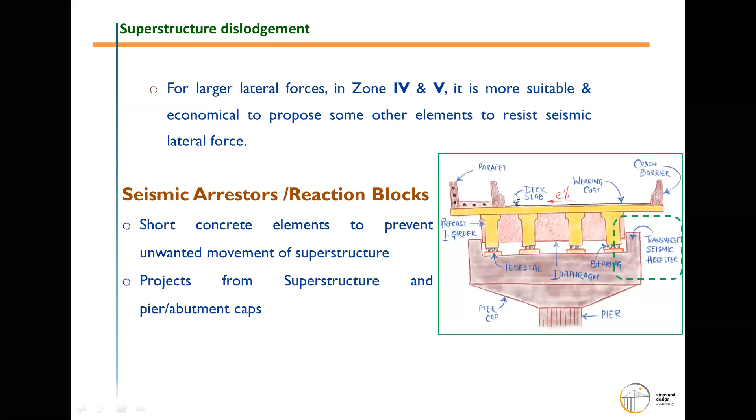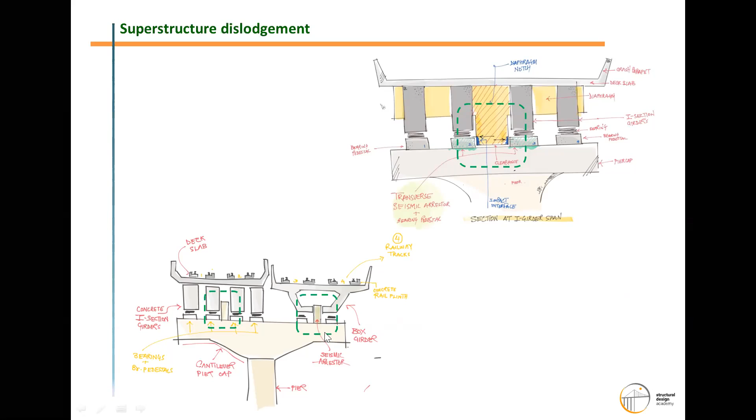There are a wide range of provisions under this clause, and many varieties we can provide. One is to project a reaction block from the end beam of the superstructure itself, arrested by the pedestal. In another figure, we can have a single concrete element protruding from the pier cap, arrested by the two girder system. If it is a box type structure, we can have an opening at the support section and protrude one seismic arrestor concrete element from the pier cap. By this, we ensure that during lateral forces the structure remains in position, and the bearing does not have to take care of these additional lateral forces — if we design the bearing just for vertical load, it is sufficient.

Now, one detailing issue we face while providing the seismic arrestor or reaction block: whatever concrete element we project from the pier cap and whatever part of the superstructure we consider to arrest the movement, both are concrete. If you put both concretes side by side, during lateral movement or the lateral shock of an earthquake, this concrete may crush because both are touching each other with impact loading.

So there is a provision to provide a small elastomeric pad — a rubber pad should be there in between the structural element of the superstructure and the structural element of the reaction block. This rubber acts as a buffer and has a dual purpose: it will not allow the concrete of the superstructure and reaction block to crush, and at the same time it will act as damping. Whatever impact load is transferred from the superstructure will get some damping effect before transferring to the reaction block and then to the pier.

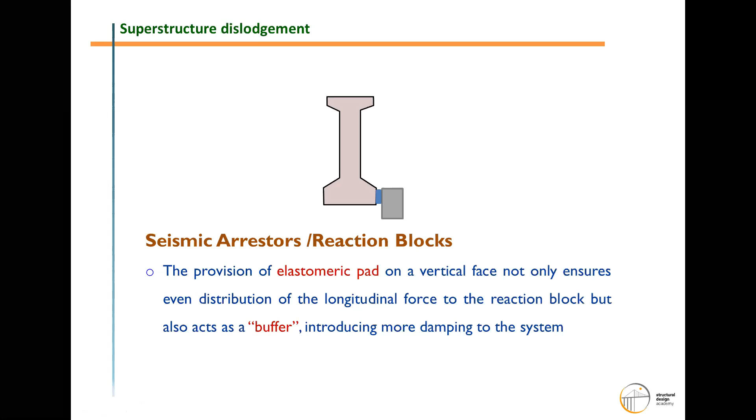So this is one of the very good detailing practices which is also recommended, and we should follow it while proposing seismic arrestors for superstructures.

I think I have covered most of the parameters and recent practices followed in the seismic design of bridges. To give the end notes, as per the latest seismic provisions of the IRC code, more emphasis is given on structural configuration and state-of-art methods rather than magnifying the force. Designing for higher force is now not the important consideration — it is not in fashion anymore. Now the trend is to develop or propose systems that are more friendly during seismic events.

Some examples of such systems are integral bridges, in which the superstructure is properly connected with the substructure without bearings, so force transfer is very good. This gives the designer a very good chance, or a vast field, to demonstrate seismic force behavior and detailing at all times.

As far as possible, we should try to avoid skew and curved bridges, because sometimes the geometry or location of the structure does not allow that freedom. But as far as possible, we should contribute more to the length of the bridge rather than introducing curvature and high skew, because curvature and high skew cause the structure to behave very strangely during a seismic event.

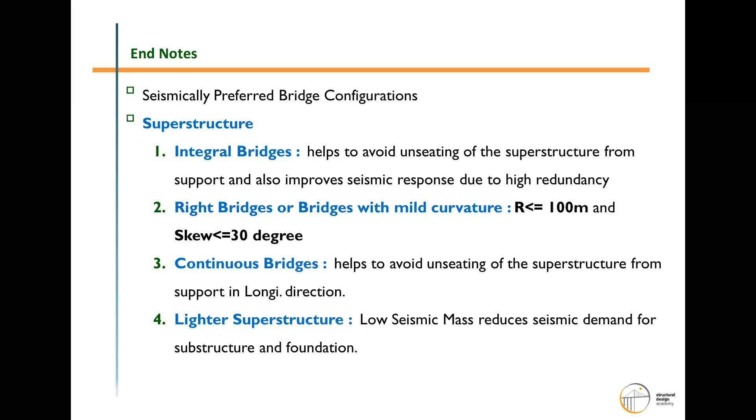Now, some issues we are facing all the time, basically in case of seismic design: codal revisions are too frequent. Every year, or sometimes every 6 months, we get new provisions. So sometimes while designing we have one set of clauses to be adopted, but during construction, after 6 months, the entire system is changed. So we always remain in doubt whether we should redesign with the new clauses or whether the given clauses are okay.

It is a challenge right now, but at the same time it is required to overcome this problem. We should not stop codal provisions; it is necessary to cope up with the recent development of science and practical knowledge of the theory. At the same time, the second problem is the inconsistency between different codes.

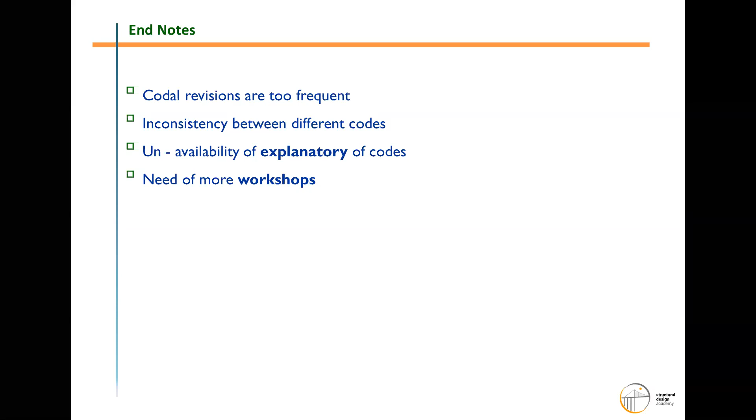Many times we have observed that explanatory sessions or workshops happen after 10 years of the release of a code. So up until then, most people have followed the practice and worked as per their own understanding of the goals. They have not penetrated into the theme of the code committee or the complete engineering thought behind the revisions.

I am closing my discussion with this photograph. This is one of my favorite photographs in the context of bridge design. I took this photograph in 2002, just after the Bhuj earthquake.

This was 30 kilometers from the epicenter of Bhuj, somewhere in a river. Frankly speaking, I had first time seen such type of pier. All the time what we have seen is solid, circular, square, rectangular, wall-type piers — the building type system has been followed generally.

If you see, there are 4 columns tied at various intervals with each other. Columns are made vertically slant, having a wide base and small top at the location of the superstructure. And surprisingly, this bridge observed no damage at all.

When we found out how old this bridge was, it was constructed in '74, where the seismic coefficient method was in implementation — a force-based design in which the flexibility of the system did not come into the picture in the seismic design itself. Even though, the structure designed during that phase withstood the highest seismic intensity.

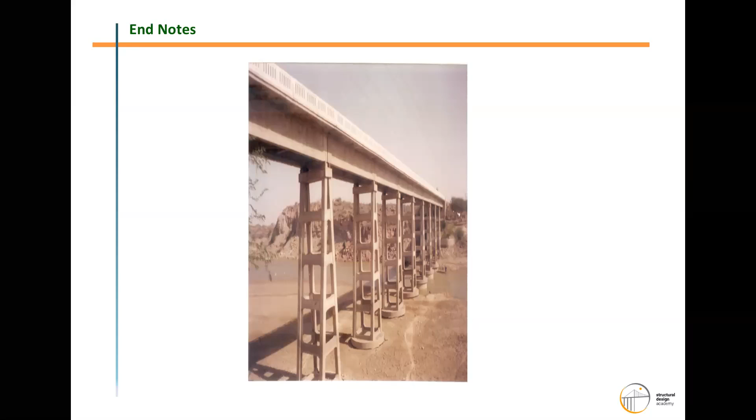So what I mean to say is, whatever the science, whatever the engineering, whatever provisions are given by the code, it has its own importance, its own taste. But the judgment and structural system an engineer develops, no one can defeat it. Even the highest earthquake can be withstood if we have developed a proper system in our structures.

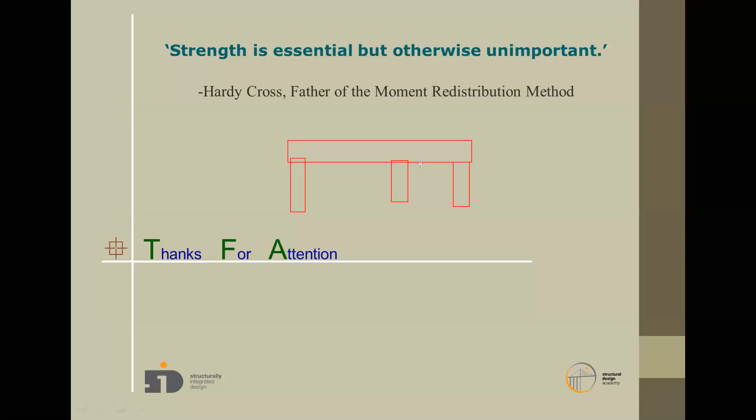Last question, I think: the IRC code gives the load combination in terms of live load, relieving, etc. Can you elaborate on this? So actually, IRC 6 has different tables for stability, for structural design, for SLS, and all that. They have given various definitions of the load - one is the relieving load, and one is the adding load.

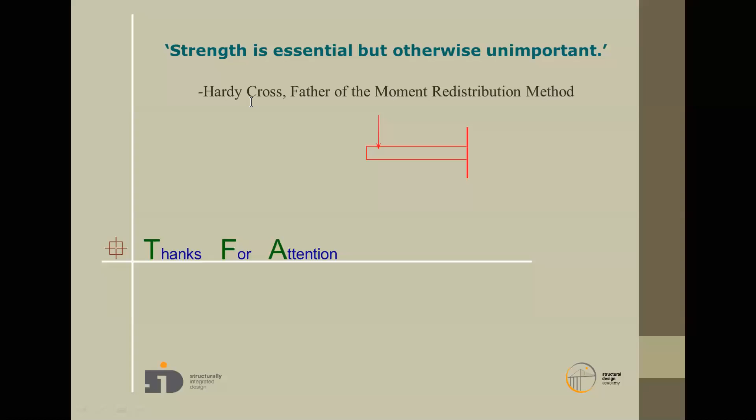Suppose I take an example of a cantilever structure. Any load I put over here will add to the bending moment. So if this load is P, and if I have to apply the load factor to this - if it is an adding load, it means it is adding to the severity of the effect, so I should give the highest factor. But on the other hand, if the structure is like that...

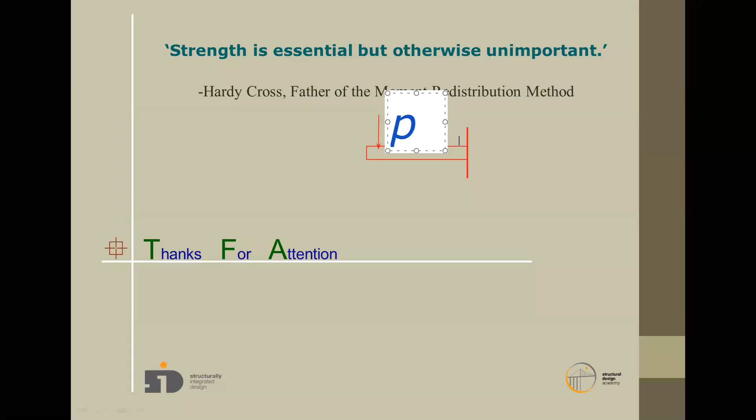Let's say, in continuous structures like this, if I put a load over here, this is adding to this location, but it's relieving the span moment over here. So if we intend to design this span moment, the load factor to this load should be given differently. So if you see in the table, the relieving load is given the minimum factor and the adding load is given the maximum factor. It means while considering the relieving action, we should consider the lowest minimum, and while adding, we should consider the highest possible - you should think for the worst load combination.

It should not happen that by applying the load factor, we are relieving the structure, that we are relieving the effect. It should not happen like that.

And for the live load, I'm not sure whether he intended this question only - there are other parameters also, leading load and accompanying load. See, there are three variable loads: live load, seismic, and wind. We should not predict that all three events in extremity will occur at the same time - it means that the highest live load is passing the bridge and a severe earthquake will come, or severe cyclone will come. We should consider that earthquake is higher and live load is minimum, or live load is maximum and earthquake is minimum. So the factor of the accompanying and leading loads is given differently in this code also.

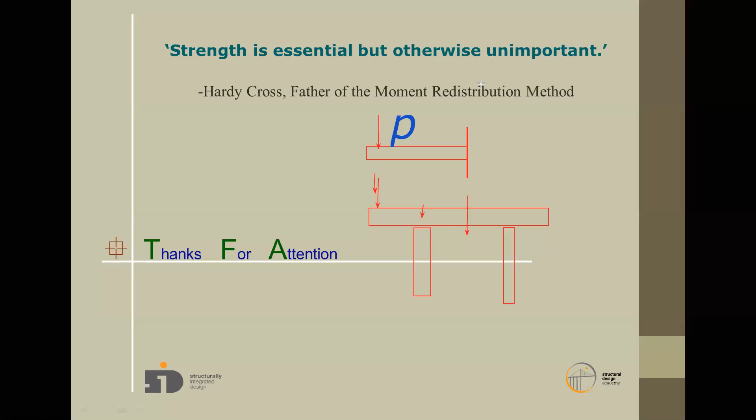And which is the most reliable software that you suggest for bridge analysis, for fresh engineers and students? I will not recommend any software.

Basically, in this recent age of computers, I observe and sometimes feel for myself also that we have lost touch with the basic understanding or fundamentals - we just rely on the software. Any sophisticated software is just a tool for the engineer, so garbage in, garbage out. Unless and otherwise we understand the behavior of the structure, or we can predict the behavior of the structures, we cannot ensure that the data we have fed into the software is correct or not. But again, versatile software is a dead end without that understanding.

Basic design can solve 90% of your problems. But if you want complicated structures, like cantilever or balanced cantilever, we have to carry out time analysis, because different segments are erected at different times, so creep behavior of each segment will be different. That is not possible with manual calculation, so to feed the data, Midas is good software. It is user friendly.